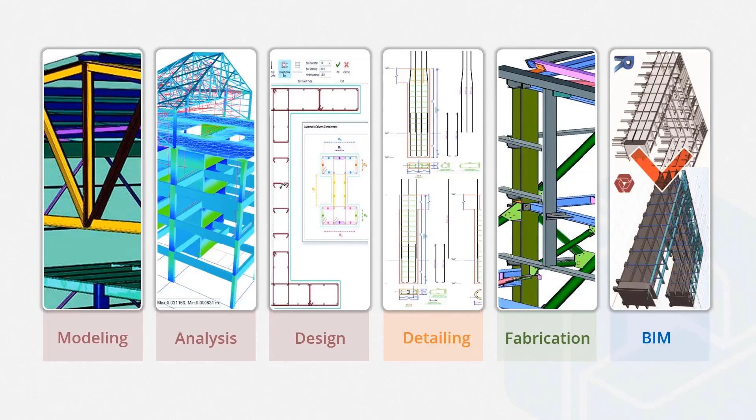ProtaStructure consists of different modules coming in a single package. We have ProtaStructures, which is the core system for modeling, analysis, and design of your structure.

ProtaDetails is a complete CAD system for automated detailing and drawings. It focuses on concrete detailing and includes a unique design library of calculations such as retaining walls, piles, pools, steel scaffolds, and pile caps.

ProtaSteel complements steel design by automating all the steelwork connection design, providing comprehensive steel detailing and automated connection design of your structures. There are drawings and calculation reports within this technology.

And finally, ProtaBIM. ProtaBIM allows you to connect with other BIM tools that you are using, such as Allplan, ArchiCAD, and Revit. You can even share the analytical model with SAP and ETABS.

We have been expanding all around the world, covering 25 international design codes and 9 languages, from Polish to Spanish, and of course English.

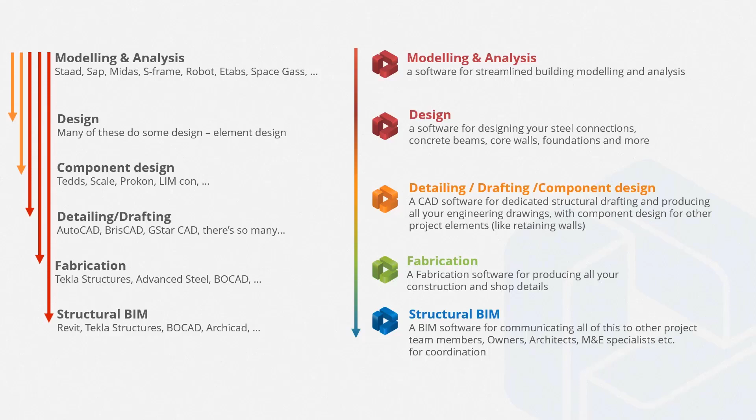As you know, there are several software solutions worldwide offering these services. Our core advantage is that ProtaStructure Suite offers all these necessary features in a single suite.

So let's talk about our new and flexible loading system. You can use the new interactive load editor to apply additional loads in any orientation and load case. For example, you can now apply horizontal loads on beams along their lateral axis.

In addition to this, point and uniform loads can be manually applied on truss joints and truss members. You can also visualize the loads in the structure in 3D.

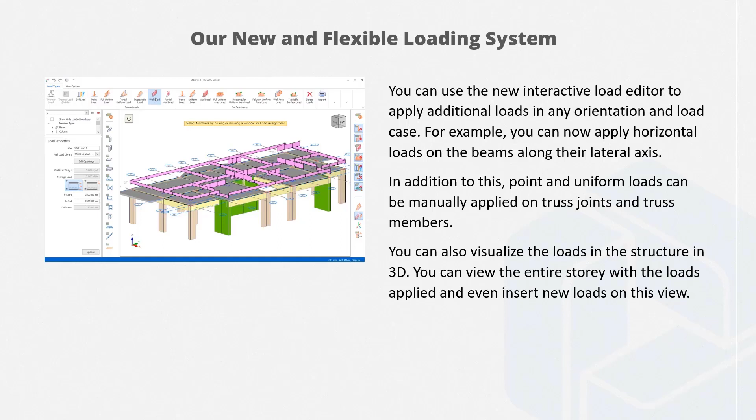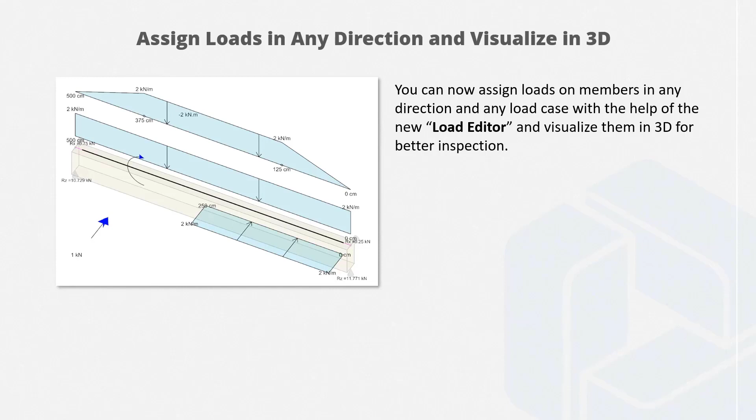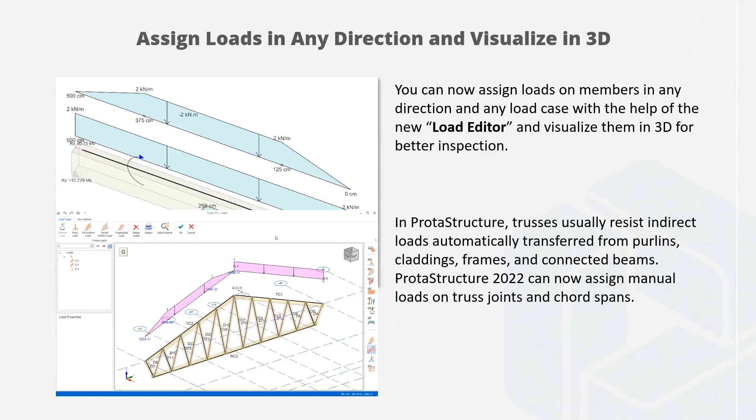So you can now assign loads on members in any direction and any load case with the help of the new load editor, and visualize them in 3D for better inspection. ProtaStructure 2022 can now assign manual loads on truss joints and chord spans.

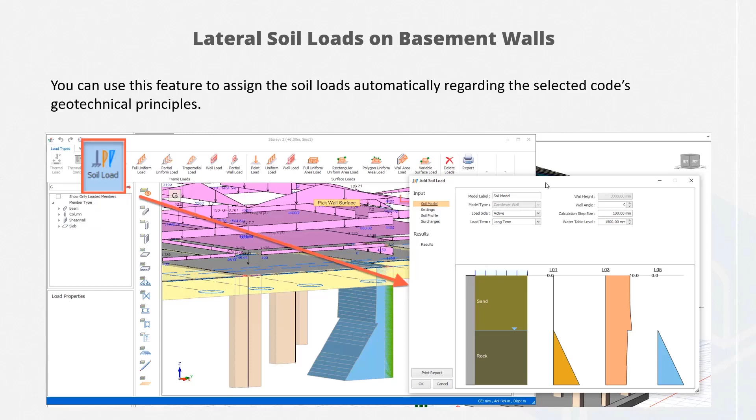Now we will talk a bit about lateral soil loads. You can use this feature to assign soil loads automatically regarding the selected code's geotechnical principles. You just need to select the soil load button and then fill in the required parameters to apply these loads.

Other loading features include automatic height adjustment for infill wall loads, detailed load profile for infill walls with openings, roof live load, and snow and rain load cases.

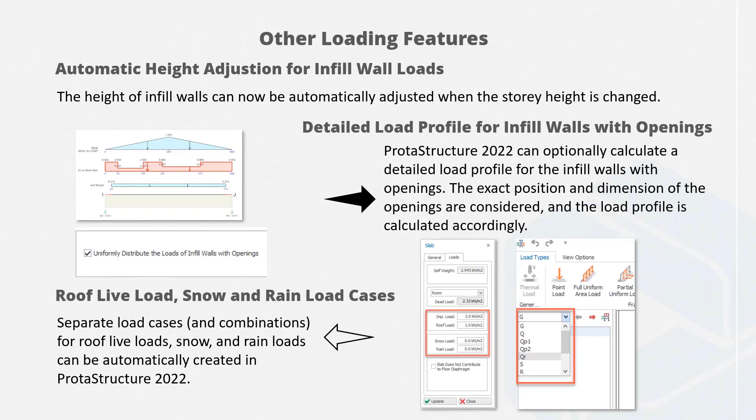We can now automatically distribute rib slab loads during the building analysis. You can insert user-defined vertical load cases and specify whether these user-defined vertical load cases will contribute to seismic masses or not.

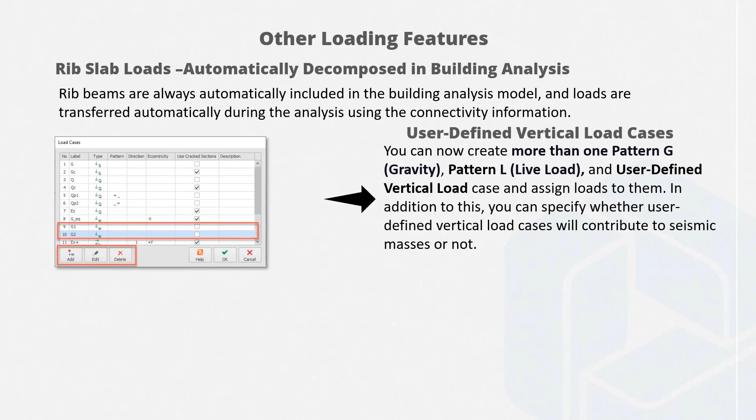Of course, you can copy and paste all these loads in the loading editor.

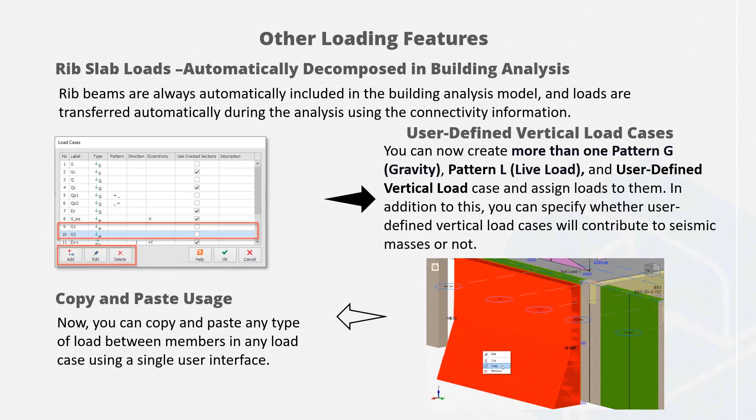So let's see all these features in action. Now I'm going to open my sample model to introduce all these features, and for this purpose I'm going to double click on ProtaStructure to open the software.

And select my sample project on the welcome page. So now I'm going to open my sample project, which is demo sample 1. Okay, let's just click on it.

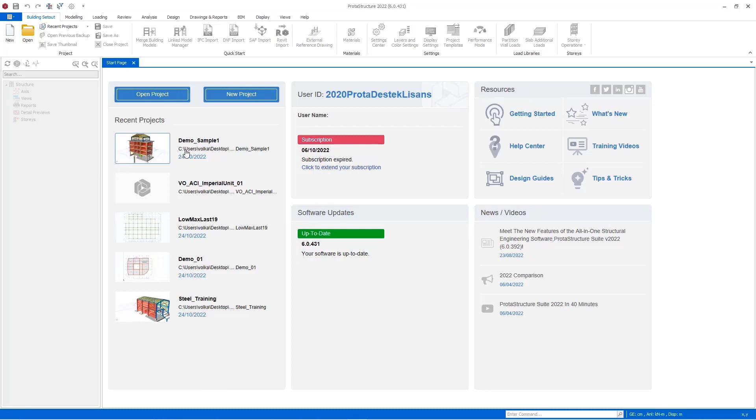Okay, now the project is loading. Before the loading editor, I will just go to the building analysis and select the load combination editor.

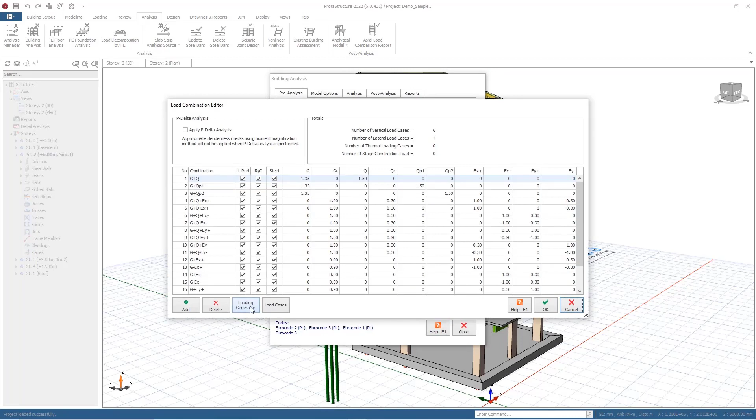In the loading combinations, we have a loading generator, and you can create all load cases and combinations with a single click here. I will just mark the necessary load cases and load combinations. You can also add seismic loading if required. Then let's click the OK button, and all loading combinations will be ready to use.

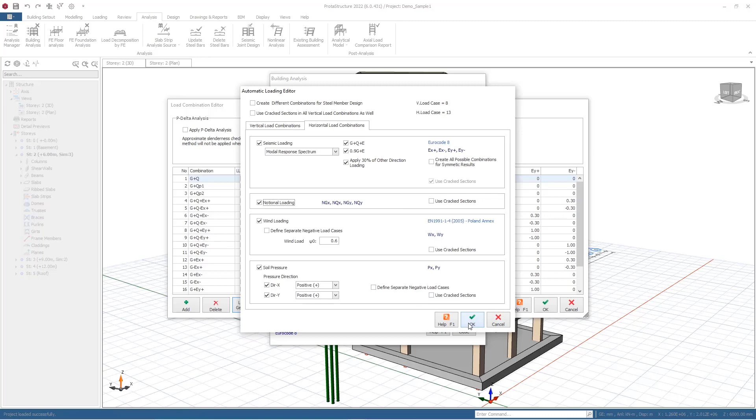Now you can see that all these combinations are prepared for the analysis, and you can use all these load cases in the loading editor.

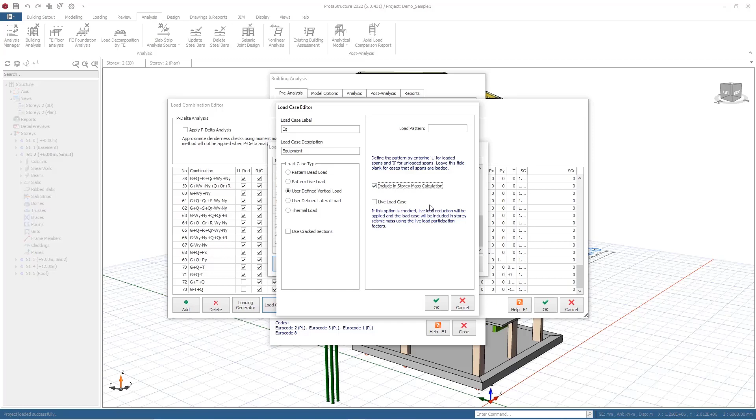Now I'm going to add my custom load case, which is a vertical load case. I will select the add button, and then add the label and description. Let's say we have an equipment load, and I'll insert the description as equipment. It will be a user-defined vertical load, and I would like to include it in the seismic mass as well. I'll mark this option and click OK. Now the equipment load column is ready for the coefficient.

Now I would like to add a new combination. It will be the third combination, the new one. I will relabel it, then change the load coefficients. Let's adjust the load coefficients: I'll insert 0 for QR, and I'll remove a couple of load cases as well, for example SG.

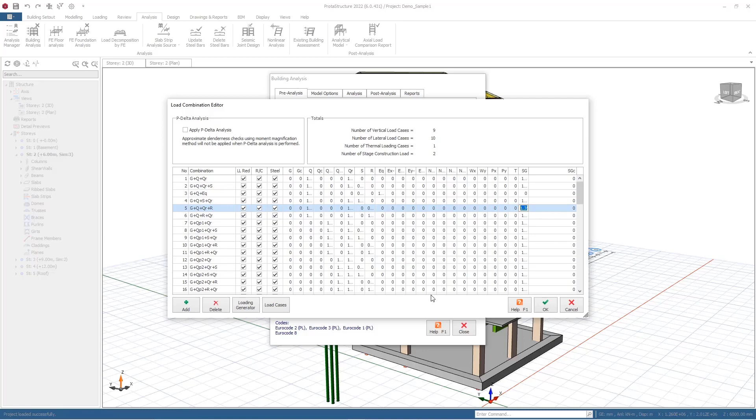Let's click the OK button after completing these coefficients, and now I'm going to go to the first story's loading editor. To do this, you can double click on the first story, then go to the loading tab and select the load editor for story 1.

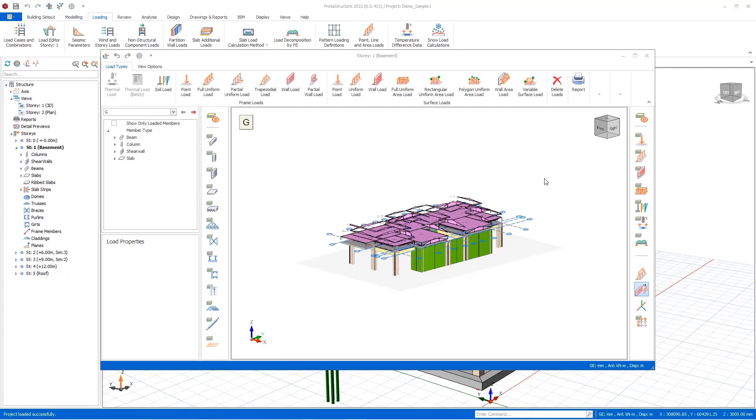First, let's activate the full screen. In the loading editor, we can filter members and loads as well. For instance, once you click on the beam button, all beams will be hidden in the editor. Using this feature allows you to review the loads better. You can also do the same for loads; you just need to pick these buttons over here.

Now I will insert my beam wall loads using the wall load button. You can set the wall load parameters shown on the left side, and I'm going to select the 10 cm brick wall from our library. Of course, you can also add your own wall load type to our library.

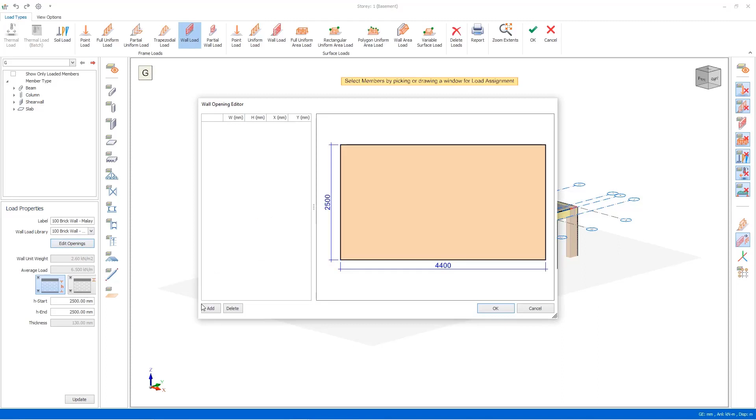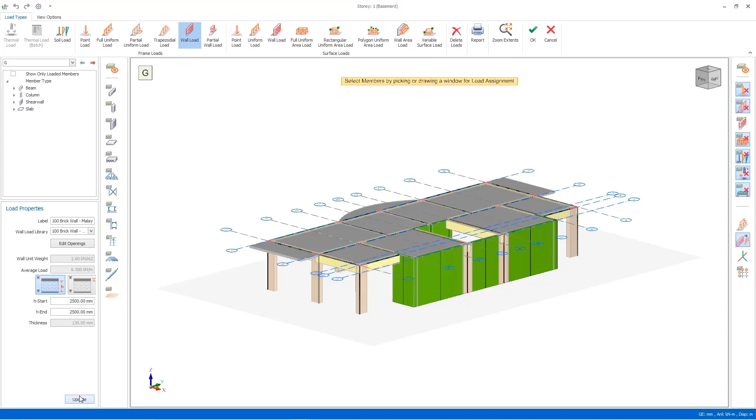Openings can be inserted as well. Now I'm going to add an opening for a window; you can insert width, height, and the position of the opening by X and Y parameters. After the opening, I will define the wall height by selecting this button, which refers to the subtraction of story height and beam height. You can also insert your custom wall heights by H-start and H-end parameters. Then we can select all the beams by boxing around them to insert the wall load at once.

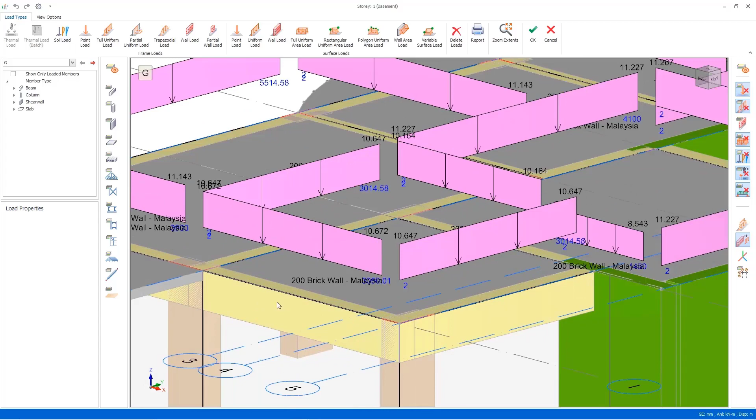If you want to change any part of the wall load, you can filter the loads and edit as you wish. You can see that it's been replaced with the 20 cm brick wall.

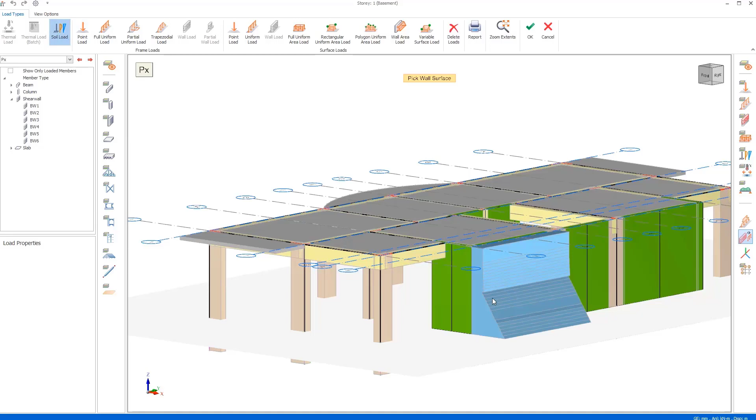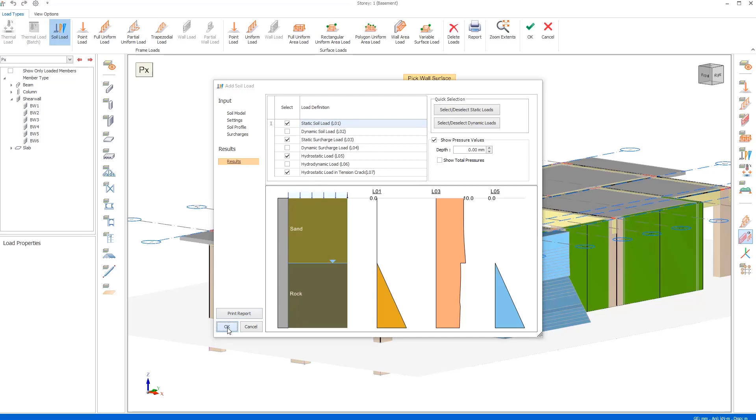Soil load is a really handy feature that can calculate soil loads automatically on the shear wall surfaces. After we select the soil load case here, we can click on the soil load button and pick the shear wall surface like this. You can fill in the parameters such as spectra type, ground type, soil profiles, and surcharge loads from here. Regarding these parameters, you will see the results. If you click the OK button, the relevant load will be inserted.

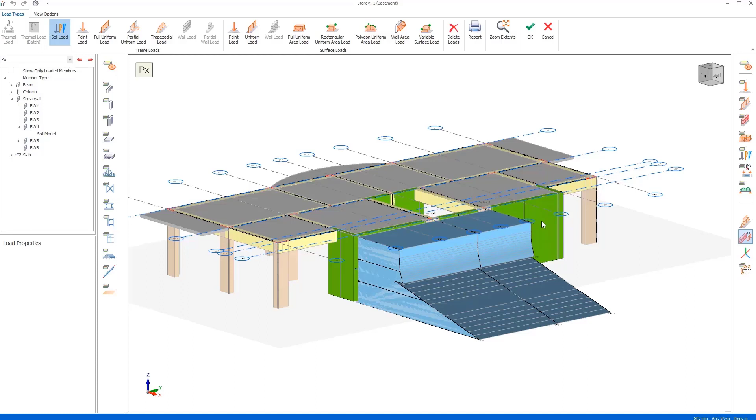We can also select this load and right click. I will copy this load to the other shear walls located on the perimeter of the building. Let's select the other shear wall, right click and select the paste command. I will do the same for the other shear wall.

Now let's try other loading options for frame and surface loads and insert them in order. Before inserting a point load, I'm going to select the G load case again, then click on the point load.

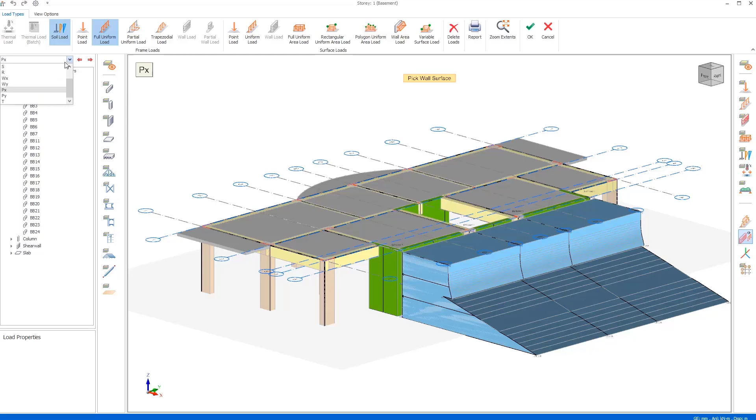In the load properties, load direction can be inserted laterally as well. I'm going to click on the direction and use the global Y option to insert a lateral load.

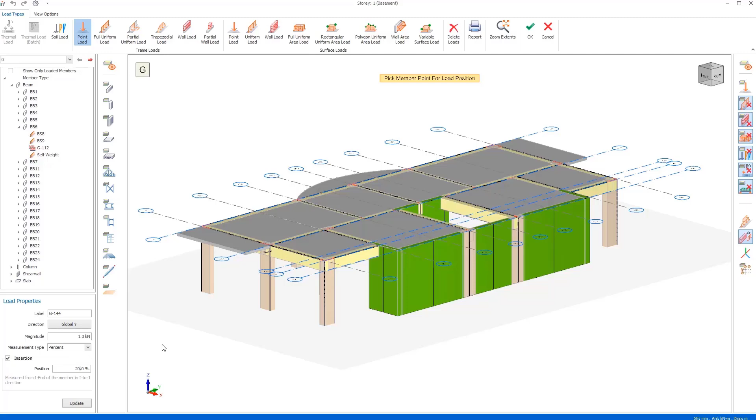Let's specify the exact position of the load by the insertion pane. Once I change it to 20%, the load will be inserted away from the starting point as much as 20% of the beam length value. So let's just add the load and you will see the point load here.

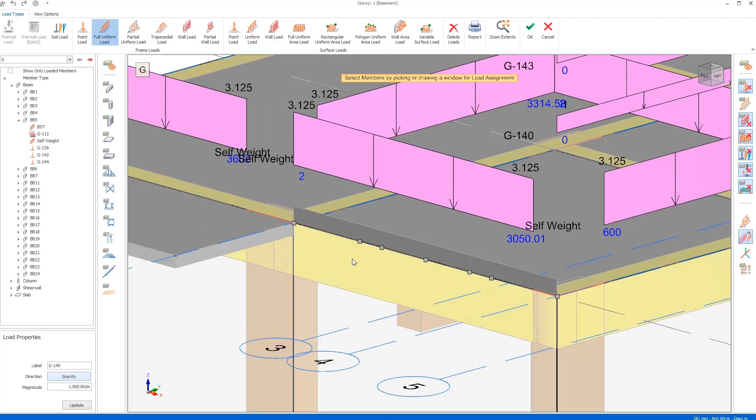Let's continue with the full uniform load. This time I will use the gravity direction to insert the load. After I select the beam, the load will be inserted and visualized in the load editor to review them easier.

Partial loads are used in a similar way. The only difference is you can specify the position in the insertion part from here. So let's just pick the beam and you will see that the partial load is already inserted.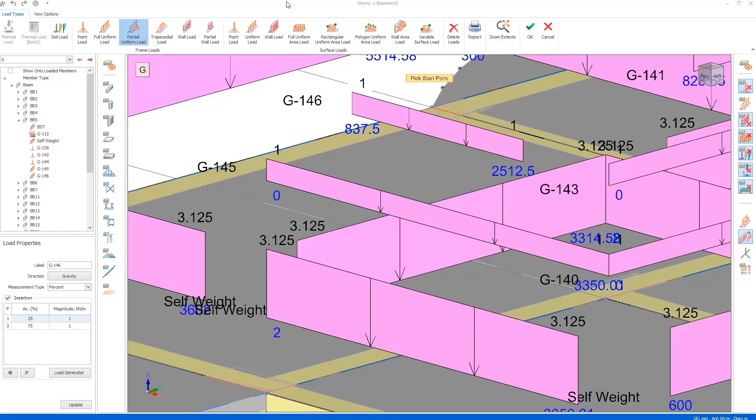So let's add the trapezoidal load similarly. For this purpose, I'm going to click on trapezoidal load, zoom away a bit, and select the beam that you want to insert the load on. Of course, load direction and insertion part can be adjusted from here.

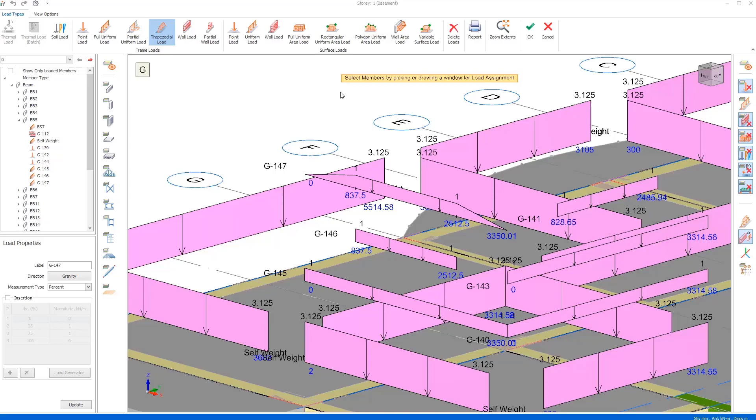So after frame loads, I would like to introduce surface loads to you. First, let's zoom away a bit and we will use the relevant tab for the load insertion.

Now I will continue with the point load. In any grid intersection or any point, you can just click and a point load can be inserted. Of course, direction, magnitude, and the other parts are similar to the frame load, so I will not mention it again. You just need to pick a point on the screen and the point load will be generated.

So the next one is uniform load. You can just pick 2 points on the screen and the uniform load will be inserted. You can specify the magnitudes, start and end positions from here.

Let's do it the similar way, for example 55%. Please note these values are percentage of the span, 60 to 75% of the span. If you just hit the update button, the relevant adjustment will be shown on the screen.

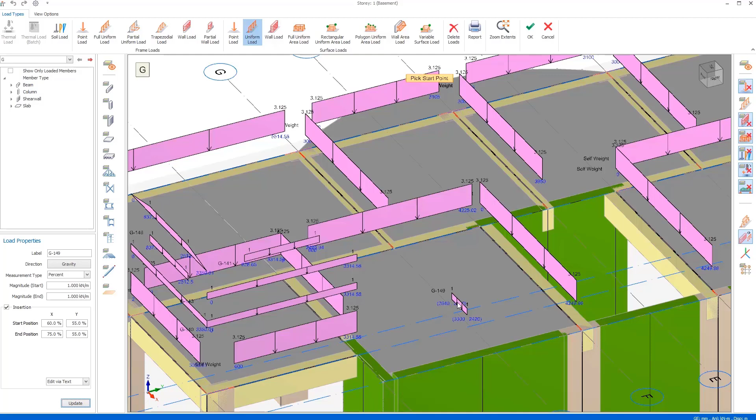So after uniform area load, we can talk about wall loads. You just need to draw a wall load on the slab surface. Any kind of wall load type in our library can be selected, and you can implement your own wall load type as well into our library.

Height of the walls can be specified from here, and insertion can be determined via the insertion part. For example, the start position might be in the middle of the slab, so I will insert 50%, and it can also be from 25% to 75% on the Y direction. As you see, it's been updated on the screen.

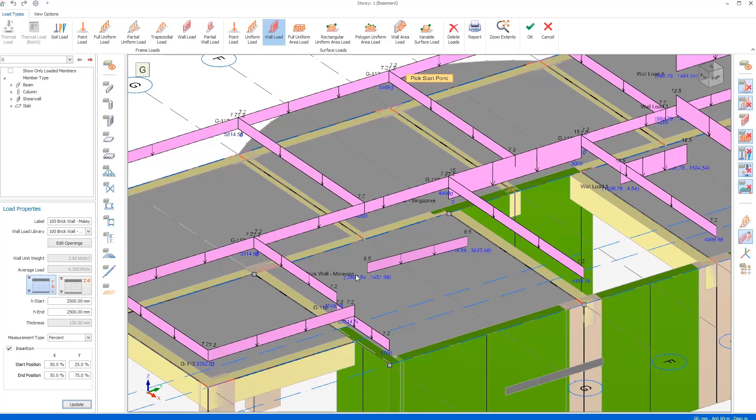Then let's talk about full uniform area loads. We need to specify direction as gravity first. Of course, any load case can be selected here. Then we just need to pick the surface and the load will be inserted.

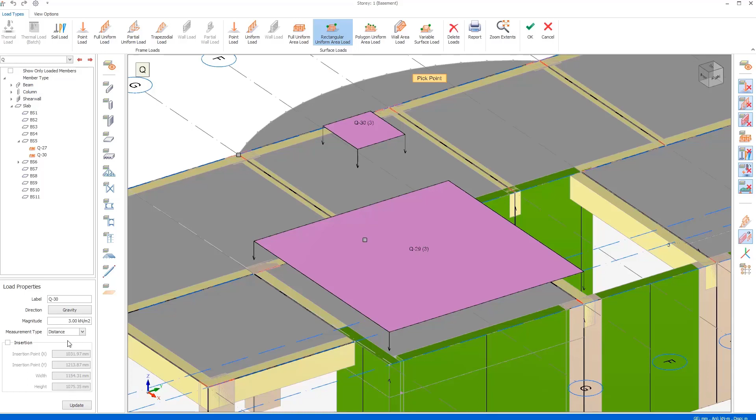Rectangular uniform area load can be inserted as well. For this purpose, we just need to draw any rectangle on the slab surface, and the software will generate the load like this. Of course, the same load properties are available for the rectangular uniform area load type.

So the next one will be polygon uniform area load. In this load, you can draw the edge of the load, and when you right click, it will be inserted.

Variable surface load is exactly the same as the rectangular uniform area load, but the load can be specified for each edge of the variable surface load.

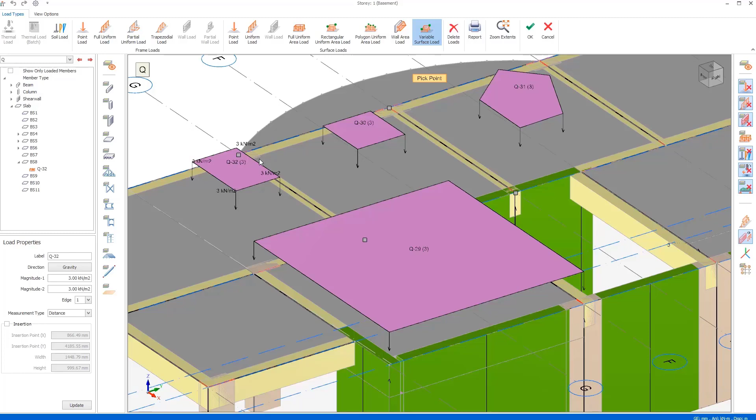Lastly, I would like to talk a bit about thermal loads. Let's hit the escape button and select the thermal load case. We have two options. You can specify it for a particular member with the first one, but I will use the batch mode. T-axial means, for example, if you have seasonal records of temperatures, you can insert the difference, maximum and minimum difference here.

T2 and T3 gradients are only available for surfaces. If you have a big temperature difference between the surfaces, you can use these options. So let's insert, for example, 10 degrees for all members.

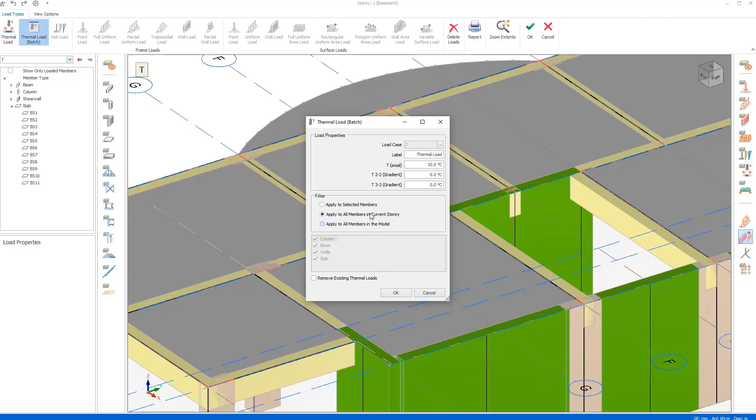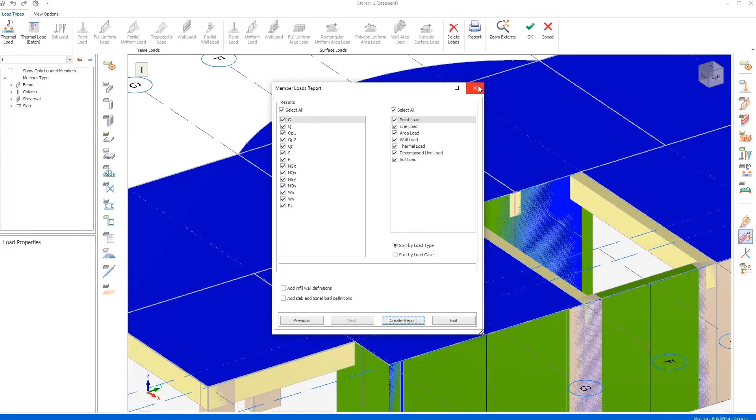So if you want to have a report, you just need to pick the report button. Let's select first story, and we can quickly create a report that includes all these inserted loads. So we have a detailed report like this, and let's click the OK button.

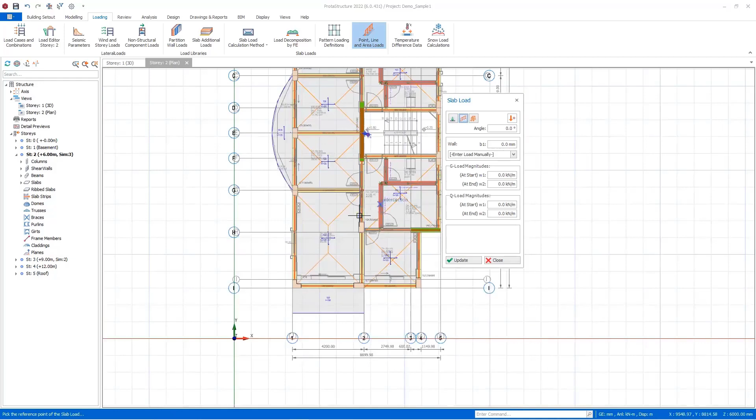On the plan view, if you have a DXF layout, you can also draw your loadings from the slab load part - point, line and area loads. For instance, let's insert the magnitudes and we can draw along the DXF layout like this. Of course, any point load or area load can be inserted as well.

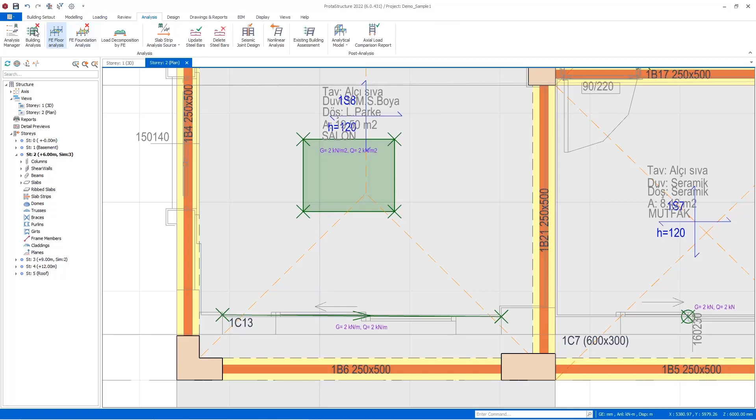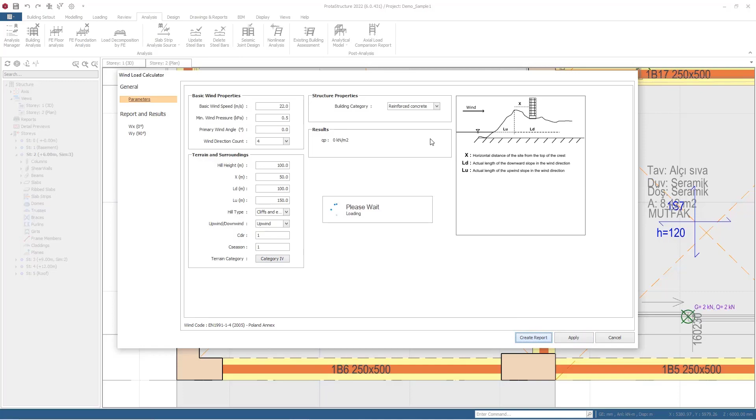Lastly, I would like to talk about our automatic wind load calculation feature. You just need to pick the wind and story load, and here we have a wind load calculator. You can fill the relevant parameters: basic wind speed, wind pressure, hill height, terrain category. The software will automatically calculate the loads. You will see this in the report, at the end of the report, and then we can apply it to each story as you see here.

So let's talk about the analysis part - we can analyze the building and review the results for the relevant load cases. By the way, in version 2022 we have made significant improvements, and now the analysis duration has been decreased.

You can quickly design your columns, shear walls, and beam members. So now the analysis is almost completed - let's just wait a bit more.

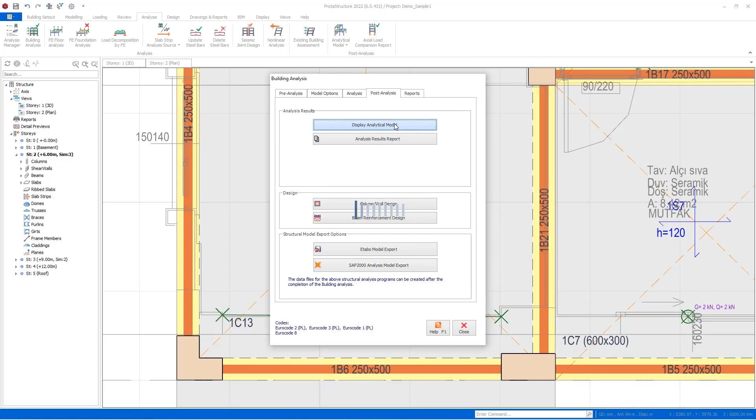So now what I can do here, we can go to the post analysis, select the display analytical model. For example, under the wind load case, we can see the displacements, for example, on the X direction.

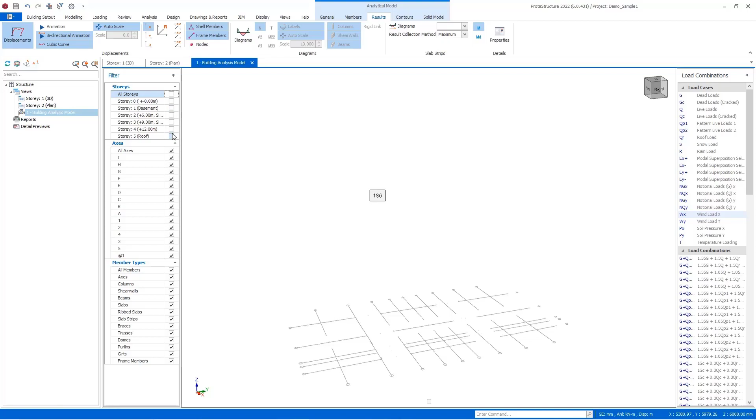Generally, I prefer to filter a story. For example, let's select fourth story, and we can review the lateral displacements under this load case, or you can activate the diagrams and select the load combination - this one, for example. And axial loads or shear forces can be determined from here.

So let's continue to our presentation, and then I will take your questions at the end of the webinar.